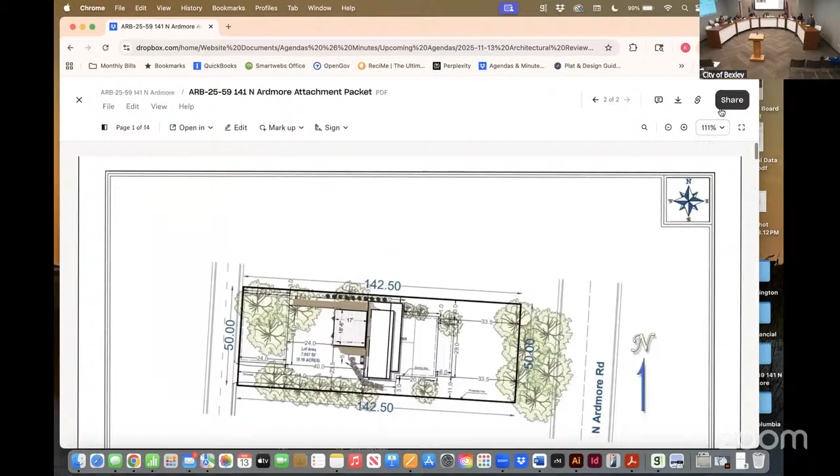Is the applicant here? Okay, seeing no one, we will hold on to that, and if they show up by the end of the meeting, we'll just add them to the end of the meeting or end of new business.

Okay, so we'll hold it to the end of the meeting and see if they show up by then. Okay, the next application is ARB 25-60. The address is 164 South Stanwood. The applicant is Amy Lauerhass and the owner is Catherine Todd. The applicant is seeking architectural review and approval of a certificate of appropriateness for a second floor addition over an existing 1-story of the house, back porch and deck addition.

And I see Amy is at the podium. Can you be sworn in, please? You state your name and address, please. Amy Lauerhass, 753 Francis Avenue. You swear or affirm the testimony you give this evening will be the truth? Yes.

Okay, do you want to give us a little bit of background on this project?

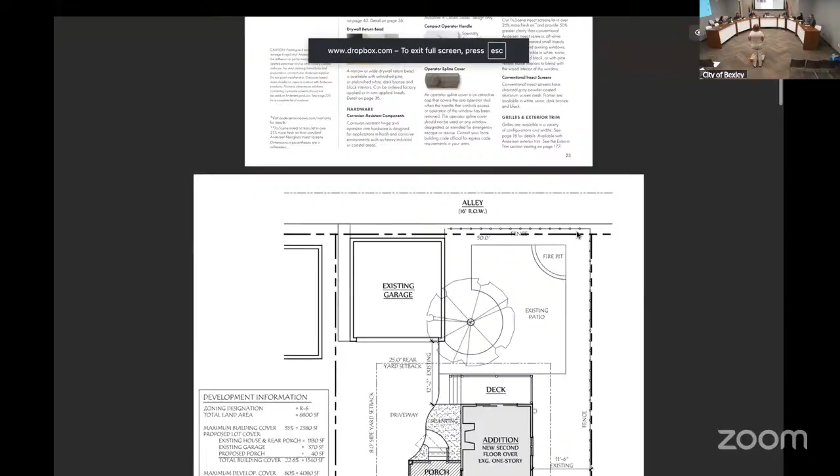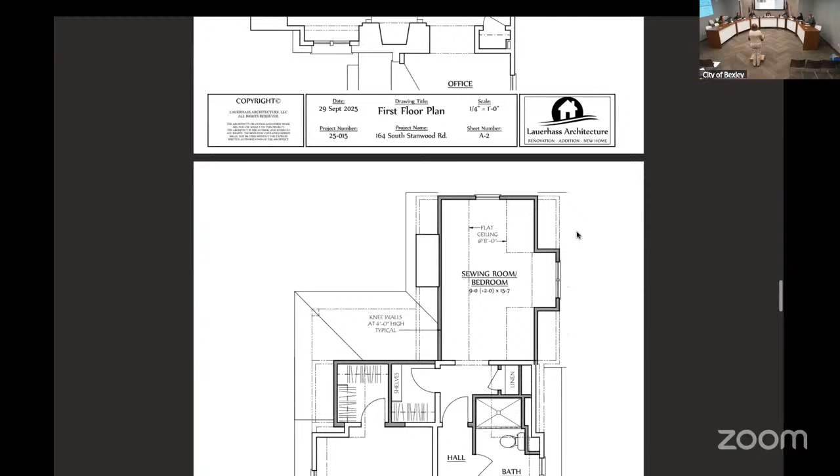Sure. So basically we're doing two things. There's a one-story addition on the back of the house that we're adding a second story over, and then we're adding a small addition on the northeast side of the house to include a mudroom and a covered porch.

Okay, I guess we'll go right to... oh Karen, do you want to give any input? I really don't, I mean I usually do, but you don't have anything else to add? It was proposed as a consent item, but I think a couple board members had a few questions. I don't have to add anything first.

Okay, we will go straight to board members then. Is there a board member who would like to go first with their questions for Amy? Well, I might as well let the rabbit out.

So my question on this has to do with the style of craftsman architecture. Your addition bumps out in plan, so the peak of your addition no longer aligns with the roof of the existing house - you can see where it's poking up there. The original design of this house, when you have an extension, it always happens to be in line, but it never creates this funky peak area.

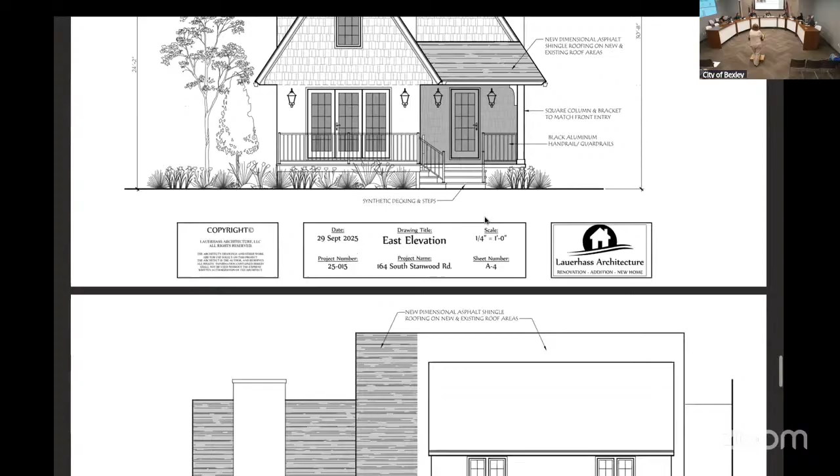That's just an addition, a second floor over an existing addition that's already there. Right, but the way you've designed the roof of the second floor doesn't allow it to be seamless with the roof behind it, like the rest of the roofs on this house - or not all the roofs, but there's that alignment. It feels weird that it's pushed off and doesn't fit the character of the house to me.

Well, if you can scroll back to the south elevation, the part of the addition - you can see there we are extending part of the main box of the house, but then the second floor addition is over that existing one story, which is already bumped out. I basically kept all the existing soffit depths and roof slopes so I could get the maximum amount of usable space upstairs. The roof is so steep that there's not a ton of space up there. I felt like that was a little bit better detail than having a totally different roof slope or not having the same soffit detail as the rest of the house.

Yeah, it's tough, isn't it? And it sits so far back that I don't think on this side you'd really perceive that, just because it's so close to the lot line. Yeah, the elevation certainly exacerbates that - you can see how they're off. Maybe it's just because the line work is so strikingly different from the way the existing roofs meet, having that little bump. So my question to you is: is there any other option for that roof line to tie in more gently where they come together?

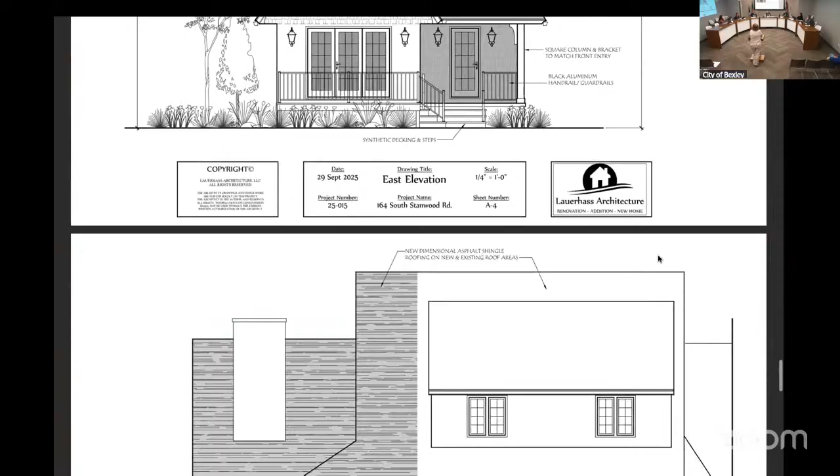I mean, that was my only reaction - it just doesn't look right. I think there is a valley, if you look at this. Oh, there is a little bit of a valley, yeah. So you'd have to have some kind of cricket inside where the two roofs overlap - there's a little valley there.

Yeah, I think you would see that walking by as you look back - you would see this for about one foot. I guess from this angle you don't see that the dormer is projected out quite a bit beyond the main house dormer.

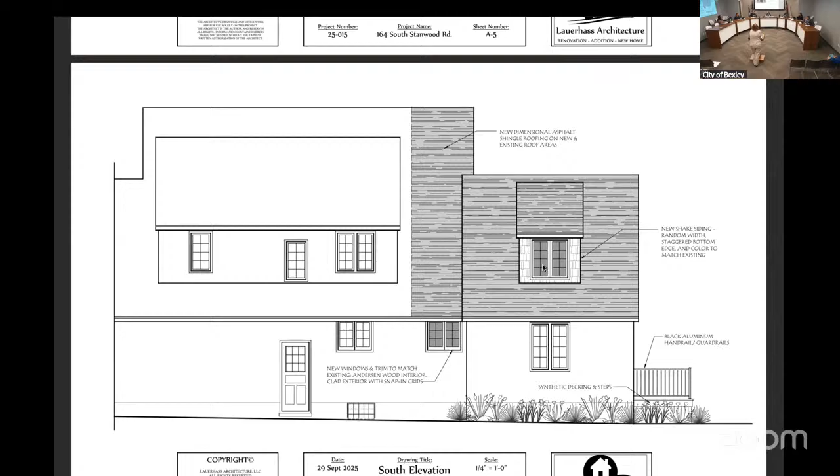The only way I could see to potentially try to align those is to just make the soffits different. But if you go to the elevations, this lower right elevation, you can see how the roof eaves and the sweeping of an eave can actually add to the character of the house. And I didn't know if there was a way, because that's...

Asymmetrical, even though you come to a peak, but that peak does align with the window - the dormer or the gable window above does align with the windows on the first floor.

But in your addition, what do you have back there? You have the triple doors. I'm just wondering if there's a way to keep that localized symmetry of the upstairs window in your elevation and the three doors on the bottom, but pull that roof line and then maybe do an asymmetrical sweep.

Maybe there's brackets on the south - that would allow that roof to go back in plane with, I don't know. That was my only comment. I mean, it's a beautiful design. I just wanted to have the conversation to see if there's a way to make it work.

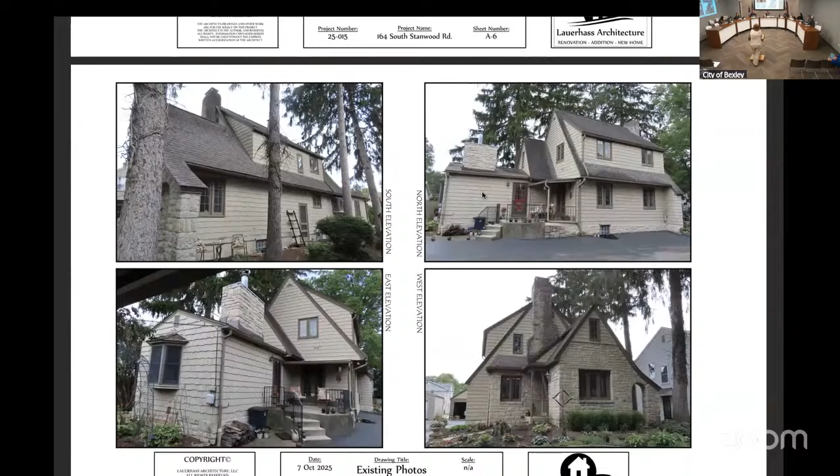I'm just worried how much actual real estate I'd have upstairs in that bedroom. Well, can you go to the elevation? I'd have to probably expand that dormer.

Well, I guess I'm just saying that like right here, go to here - and then the dormer slope reduces a little bit, but you don't lose any room. This is all happening above your ceiling. Oh, I see what you're saying.

So this would come down to the center, and then you do a gambrel there, and then this dormer would then be at somewhat lower slope. But at least you would tie the ridge of this into that intersection with this, where it comes down and it slopes and intersects right at the center line here. I think the quirkiness of that gambrel in that location would be fairly hidden, but it at least would tie things together.

And that would be a lot less hidden than what I've shown. But that would change the pitch of the roof, right? Yeah, roofs won't have the same pitch.

To me, a gambrel is this - the roof will have the same pitch until you get to here, and then it slopes in at a different slope. So it'd be a gambrel, but it's a very small gambrel. There's enough quirks on this house that I think you could get away with that as an addition, that it would read as part of the natural character of the house.

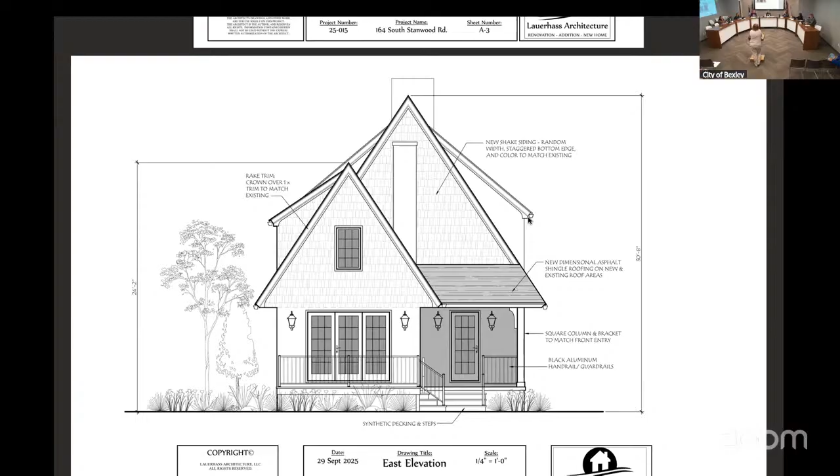Go back to the side elevation. In the side elevation, Amy, it looks like the other one, like about a foot, keep going. Oh, you were right, Dylan. There's the... yeah, it's basically the wall thickness and then the rake trim. That's all that's there.

You're not actually, I mean, there's the wall overlap. There's not really any wall overlap. But the trim work is to both sides. So basically with snow and everything, that would all have to be metal. You wouldn't be able to take the shingle into that valley. It would have to be brought up on the rake and on the roof.

Anyway, I just think there's an opportunity to clean it up. I'm certainly happy to look at that and work with Karen. So not a condition, but rather a suggestion to explore. Yeah, I think so. This is a detail we've done before, and she always comes up with an option.

Is there any other board member that would like to talk about this application?

Okay, so are you good then? You'll work with Karen and just come to the best result, yes? Okay. Is there anybody else in the audience that wants to speak about this application? Okay, seeing no one, so we are basically approving it.

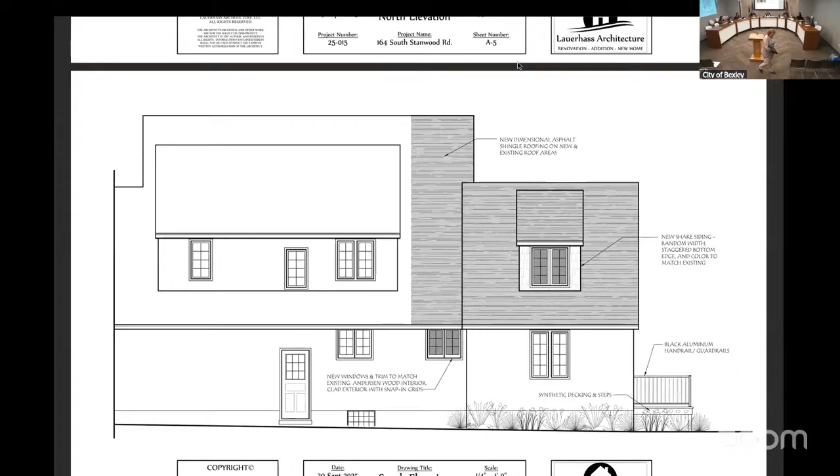The next application is ARB 25-61. The address is 217 North Cassingham. The applicant is Sean McAllister. The owner is Jim Wingard and Janice Mannheim. The applicant is seeking architectural review and approval of a certificate of appropriateness to replace the front porch.

Sean McAllister, 130 North Maple Street, Marysville, Ohio. Do you swear or affirm the testimony you give this evening will be the truth? I do. Thank you. Will you give us a little background on your project?

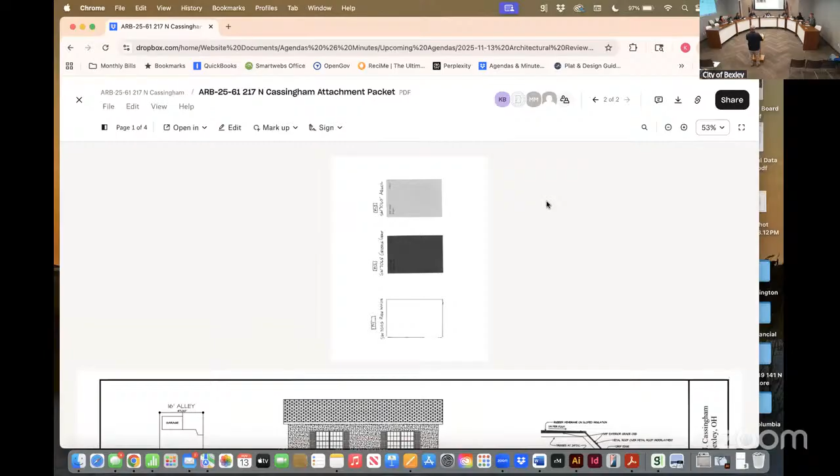Yeah, my client wants to do a new porch, and also paint the front, remove the upper shutters, put trim on there, and replace the shutters on the downstairs, lower level. That's pretty much it.

Okay, is there a board member that would like to go first with this application? You want me to do public first? Is there anyone else in the public that would like to speak about this application? Okay. Is there a board member that would like to go first?

I'll go, Ms. Panofska. I'm curious about some of the design decisions for the styles. That's what the owner wanted. So, yeah, that's the best way I can answer, in terms of the roof material and the changes of the metal, including the style of the column and everything.

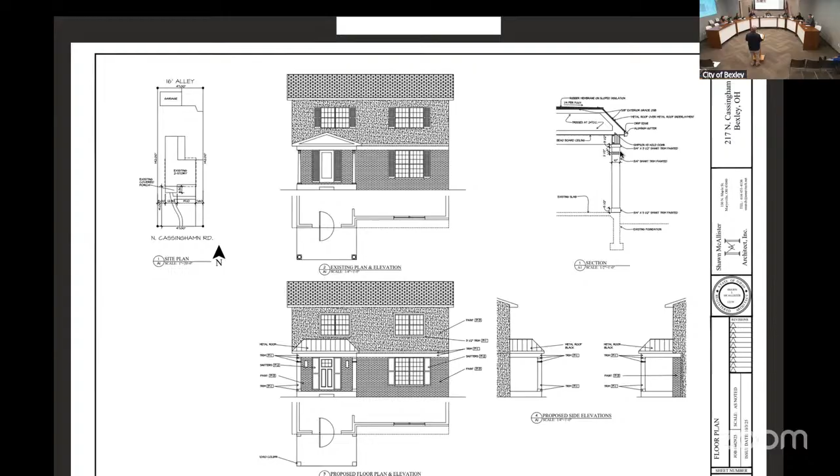Okay, I'm more curious about the decision. Yeah, you basically would have a piece of trim. There is a section in there, if you look on section 3A1.

Yeah, I don't know if I understand the inclination for it. Just stylistically, for me, it just doesn't do it.

Is there anything else, Ms. Mattson? No, not at the moment. Is there a board member that would like to go next? I have a question first, Mr. Scott. What was discussed up to this meeting with staff?

So I wrote my staff report. In my staff report, I pointed out that I don't really understand the massing of the... well, first, let's just go back and say I hope all of you drove by this house, because with the risk of insulting the owner, which I certainly don't want to do, there's not a lot significant about this house. So I'm not particularly tied to the gable, as opposed to a different kind of portico, but I don't understand the choice of the shape of the roof.

It seems to me like even if you wanted to go with a metal, then maybe just a simple shed. Yeah, that's what I would suggest. Better massing, because this is, especially if you take those shutters off of the second floor, that is gonna kind of be tiny compared to the amount of exposed facade, in my opinion.

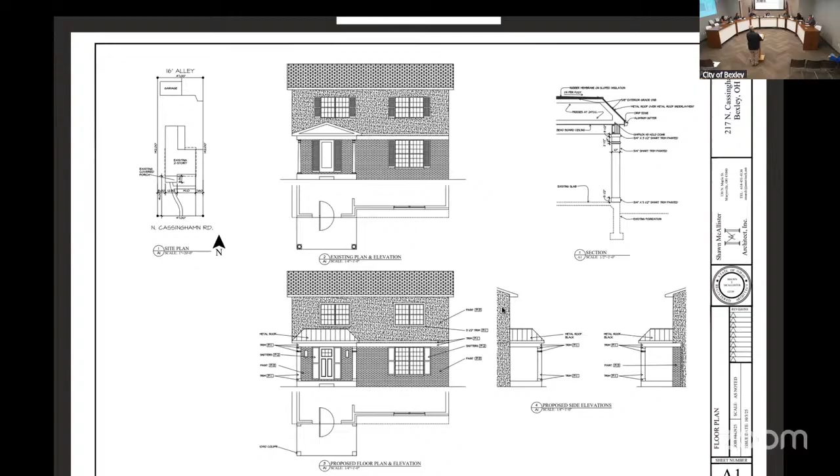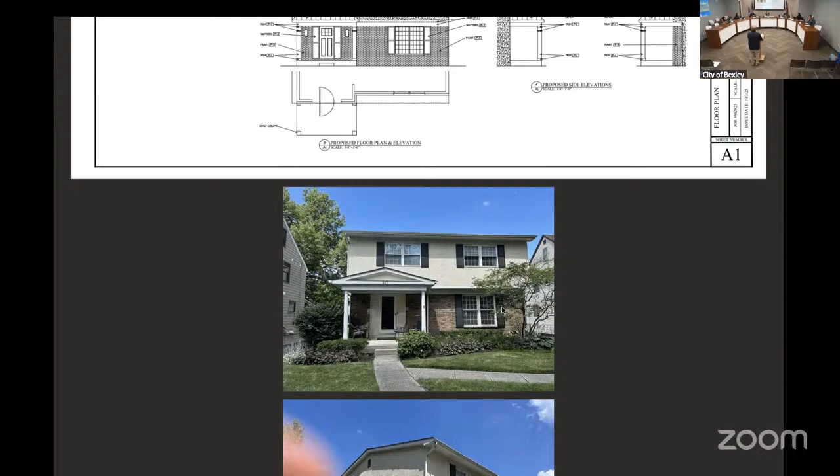I know there's existing shutters. I was looking at this photograph of the front facade, and for the life of me I thought there was a big piece of glass over it, because it looked like a reflection, but it's white paint. Are you planning on painting the brick white? No, it's going to be painted - it just looks painted in the photograph. Okay, so you're painting the brick.

It looks like a light gray. And the shutters, are they being replaced right now? Yeah, they're being replaced. So you're doing more of a paneled shutter, left and right of the door. Yeah, and those are the darker color, the shutters.

And then is the door going to be the same color as the shutter? It's a good question, I'll have to find out. I don't think they have to be. I think the shutters - I'm assuming there might have been side lights at some point, because the brick stops and the shutters are recessed in the facade. So I'm guessing at some point this door might have had side lights that got covered up.

Maybe not, but there are times where there's detail and ornamentation, so I'd think about moving away from the terminology of shutters, but maybe just frame trim work around that door, not making them look like shutters - and I hope it's not a product you're buying to put in there. I'd look at left and right of that door having a little more trim detail, panel-based, and keeping the detail simple but making the door integrate into that overall opening where the brick is stopping.

And I think that's the last of my comments. Ms. Jones?

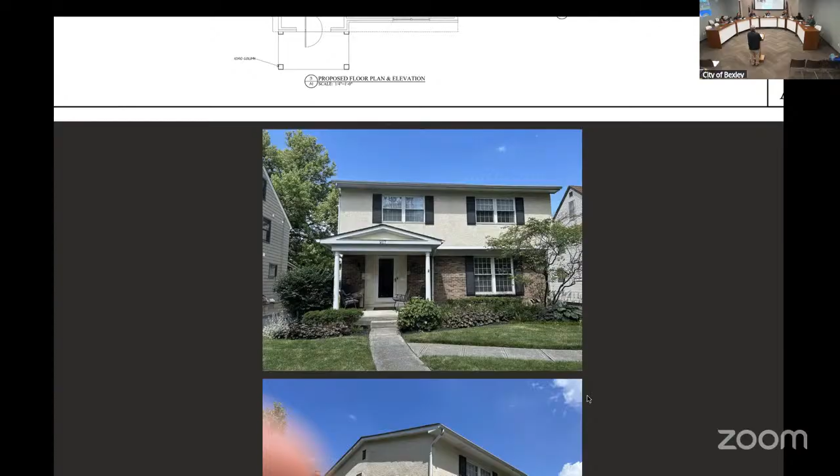A lot of my comments also had to do with the scale of the proposed columns, and whatever shape the roof of the portico might take. I do think when this is done it's going to be a really nice addition to a house that could use a little refresh, so I think we're all supportive of the cosmetic edits you guys are proposing. I think the paint colors you've picked are appropriate. Sometimes painting brick gives us a little heartburn, but looking at the brick here, I think it would be a fine thing to paint. So that's the extent of my comments.

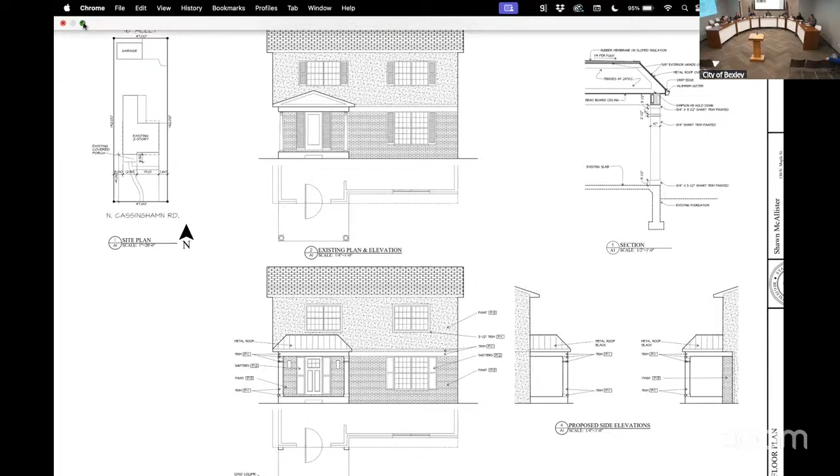The next one is application BZAP 25-45. The address is 2680 East Main Street. The applicant is K4 Architecture LLC, Sandy Tenhenfeld. The owner is First Financial Bank and Jeff Hartley. The applicant is seeking a recommendation to the Board of Zoning and Planning for a certificate of appropriateness for an exterior renovation of the existing banking center.

Is the applicant present? Please come forward and be sworn in. Rick Posey, principal with K4 Architecture in Cincinnati, 555 Gest Street, G-E-S-T. You swear affirm the testimony you give this evening will be the truth? Yes. Thank you.

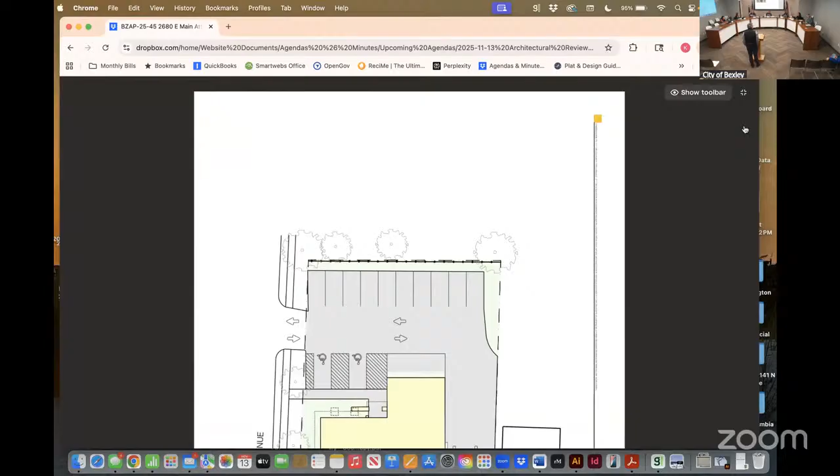Okay, can you just give us a brief synopsis of your design? Yeah, first of all, I apologize that I am not Sandy Tenenfeld, who's been speaking with you.

I just wanted to say Sandy is not here. Her son is in a band competition in Indianapolis, so she couldn't make it back. Not to expect her. Okay. And I let her know that I usually give a staff report to begin anyway, so that I could fill in the board, if that's okay with you. Oh, absolutely. I've been working with Sandy, who is part of your firm.

And the idea here is, well, there's a lot of ideas here. There's an addition to the back of the building that is proposed. This building currently, and I'm also going to let Matt chime in for anything that is actually zoning, but it overlaps in design a little bit here. So if I don't cover something, he'll fill that in. But this building currently really uses the back entrance and not the front for banking. So what the client wants to do is close up the front door, which is kind of antithetical to what our principles of Main Street design have been.

Having said that, I think we need to look at this project as if the Board of Zoning and Planning allowed them to actually remove the front door, is there still a front presence? That's how I'd like to encourage you to look at it. And that's how I talked to Sandy about it, that the column remain and the bump out still look as though it, envision it if somebody else occupies this building, could it easily be brought back to a front entrance

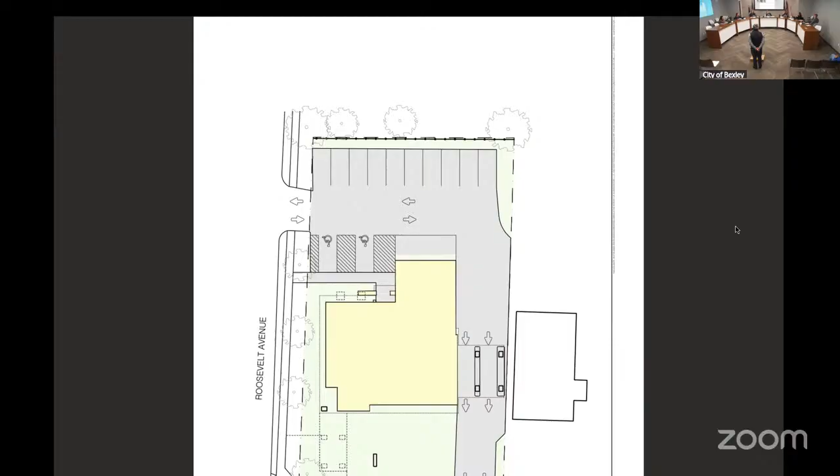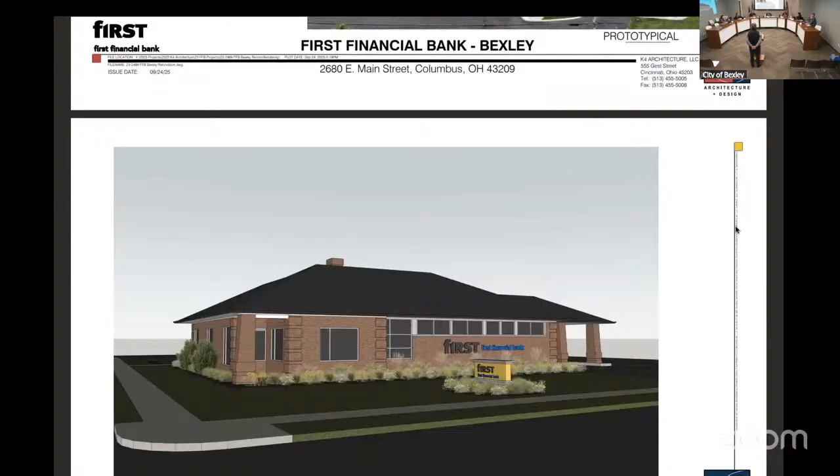This is going for variance. It's going to zoning for approval, a removal of the front door. No, it doesn't need a variance. Maybe a slight variance from the mixed-use commercial design guidelines, which say shall have a front door entrance. However, the way our Main Street design standards set up, the process is that BZAP is the approver ultimately, right? And then the applicant can come to you when it's requested by BZAP, but BZAP is supposed to look at everything. When it's more architecturally forward or visually things are changing, to be customer oriented, we like to just send them to you.

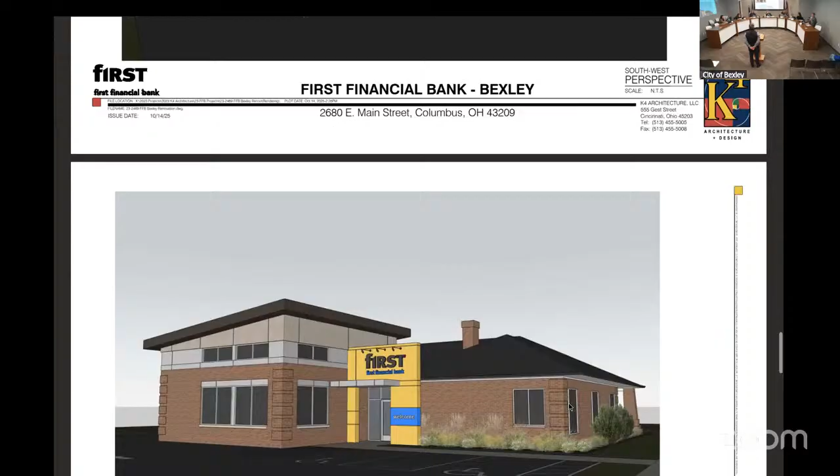Otherwise they would wait to go to BZAP on December 4th, then come to you, then back to BZAP. I figured BZAP's going to ask what our architecture review board says, so we had them come to you first. They will also go to the Tree and Public Garden Commission, since part of those columns and pavers juts out near a planting easement and ties into the landscape in the right of way, so that commission will see this too. They're looking for a recommendation from our board, that's how it's set up in the code. So, a recommendation from you all to BZAP, and back to the tree board.

I don't know if it's just for rendering purposes, but are they proposing removal of a tree in front? I don't think so, I haven't been told - might just be the rendering. I believe that's a planting easement on their property, but those are city trees along there, sycamores I think, which I believe we've since trimmed up. Let me know if we haven't. They're not trimmed up yet. Okay, I'll ask our forestry department to look at that again.

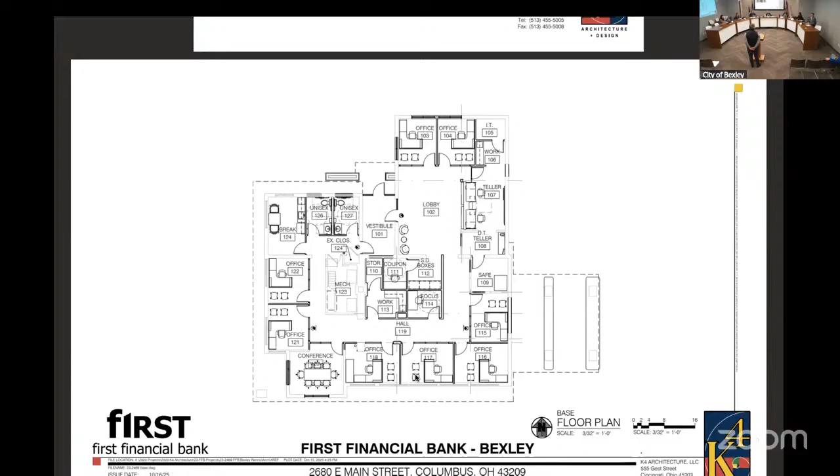Mr. Klingler, can we have clarification - is this application BZAP 25-45 or 64? On my agenda it says 45, and on my screen it says 64. Maybe it was a typo. Mine says 45. The folder says 64, but all the files inside say 45. This should be 45, I think we made a typo, just wanted to be clear. I apologize, I'll change that right now.

Okay, is there anyone else in the audience that wants to speak about this application?

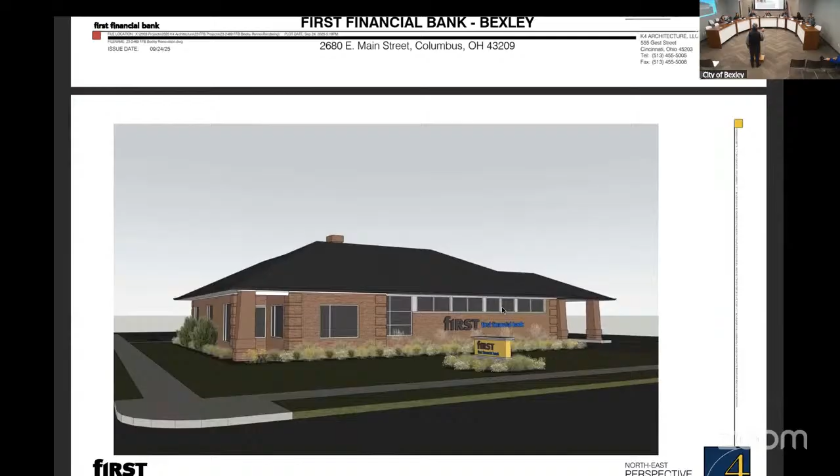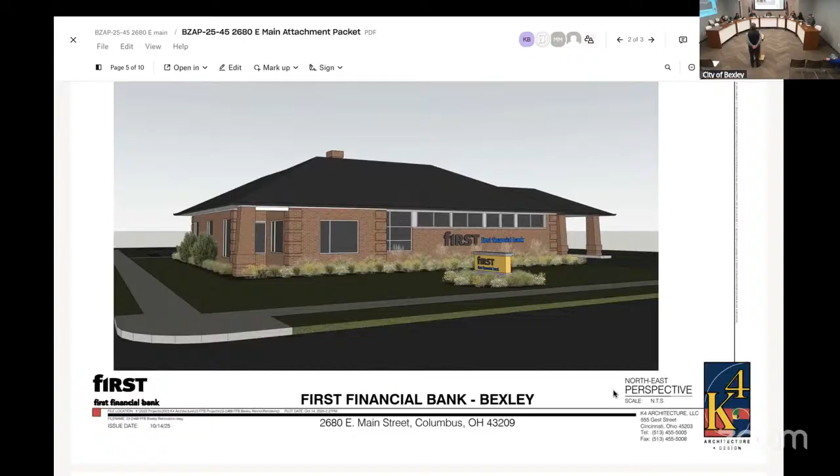If I could just add a couple background things to what Karen talked about - so why are we here, why is the bank wanting to do anything? They've been in Bexley for about 10 or 11 years, but it was only in 2022 that they actually became the building and property owner; before that they were a tenant and the former landlord held title to the building. Now that they own the asset, they're growing and they like Bexley, so there are improvements to the interior programming and functionality to get a few more offices and workstations and improve the workflow. Also, I'm an architect and a dues-paying member of CNU, and the beauty of communities like Bexley is we don't make them like this anymore - they're walkable, street facing. So losing a front door is a big deal.

But especially for the bank, there are always security issues since the parking is in the rear. Customers using the front door, especially commercial customers coming to make a deposit, might be carrying cash, and they're walking from the parking lot since there really isn't street parking. So in reworking the interior and addressing the security concern, the choice was made to improve what is functionally the main entrance, which faces the parking lot, and eliminate the front door. Although we're putting a window where the front door is, we're maintaining the little covered portico and one of the columns, so that in the future, if it's ever sold, it could easily be restored to a front door.

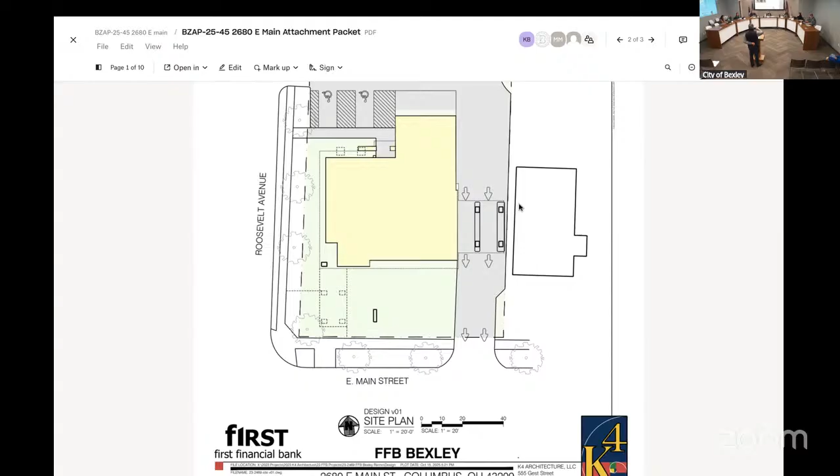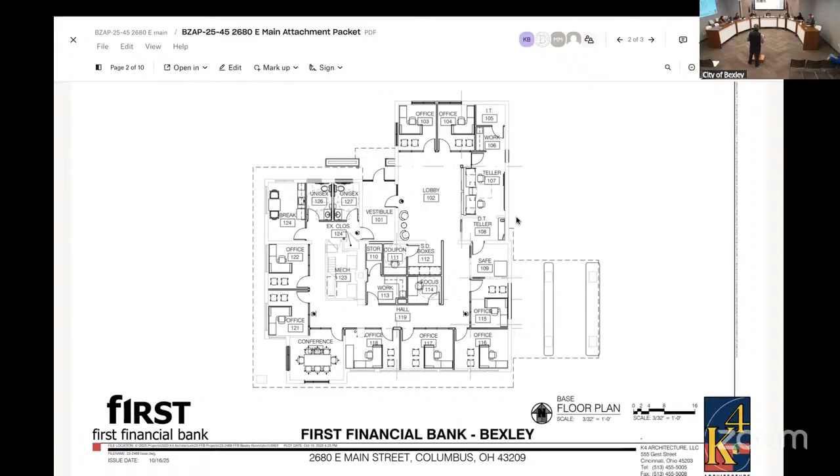So in an effort to daylight that, raise the ceiling height and begin to incorporate brand standards of the bank, at least when you walk through the door, the elements, the experience is fairly consistent, whether it's a new branch or an existing building.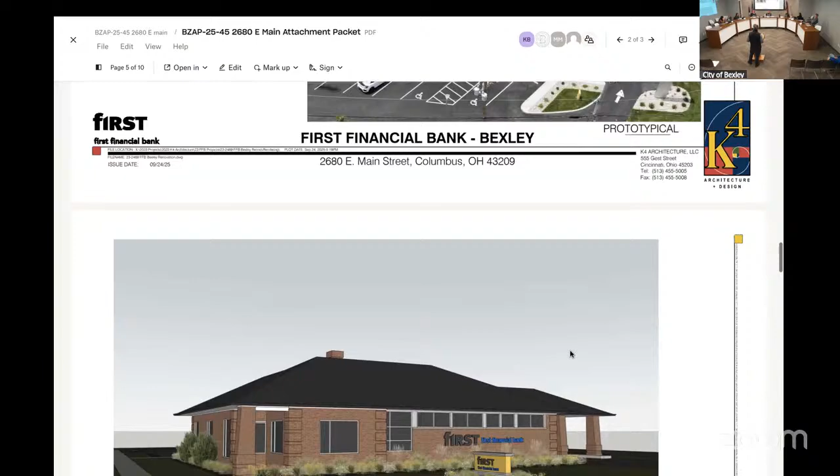You'll see here, when they build brand new branches, a very contemporary look - we'll get into talking about the yellow metal, an especially formulated color for them. But you'll see there's a raised clerestory that allows light into the lobby, and it's that element that you're seeing repeated, at least in our proposal, over that existing flat roof section.

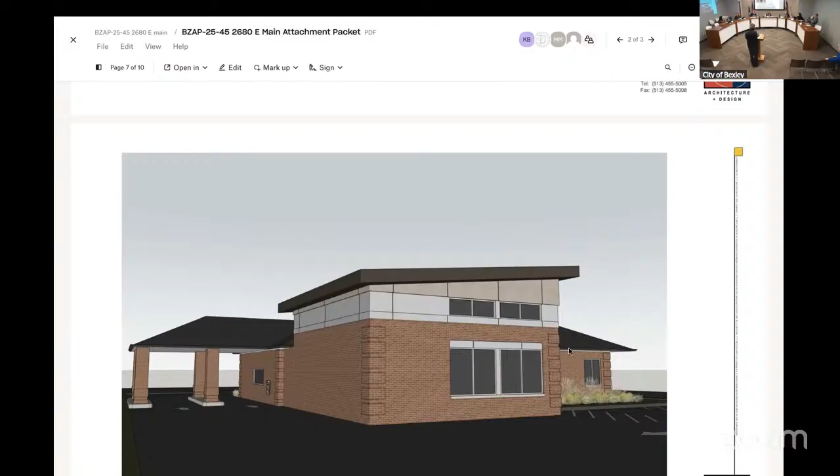And I would point out, we're raising - so the brick wall height's what exists, and we're raising that. We're separating this element with a section of flat roof that will transition between this section and the hip roof of the original building. And that continues around - go to the next - it continues behind the sign panel. So that section of flat roof resolves the extended height we're adding here.

We're also removing their existing condensing units right here. We're lifting those up onto that flat roof, so they'll be hidden. Secondly, behind the blue panel on the entry sign, we're hiding the gas meter and the gas service with that entry piece.

I think I'll stop there and take questions, concerns. Is there anyone else from your group that wanted to speak? Anyone want to speak now or wait? Okay, I would say that Jeff is the owner's representative. He is here, so, okay.

Let's go to the board then. Is there a board member that would like to go first? Mr. Scott?

Back in the 2000s, this building sat and had very little street presence, and our firm was hired to engage the street - we added a long covered walkway up to the sidewalk. I see that, full disclosure, I didn't work on it, but I am familiar with the project. First Bexley Bank, I believe it was.

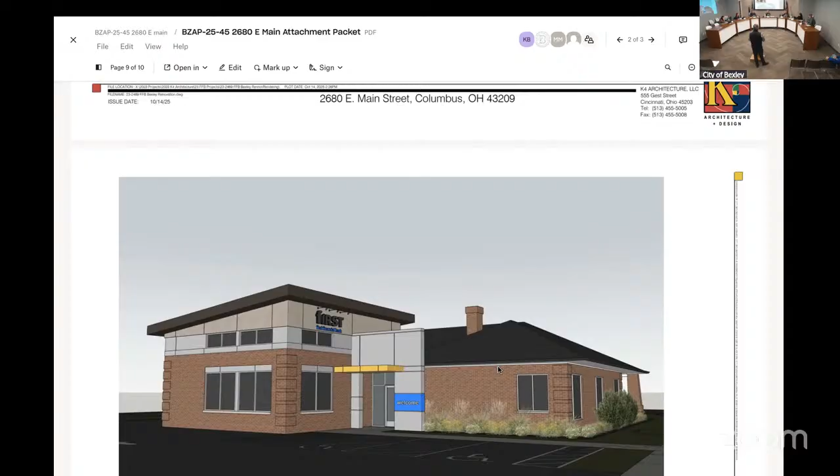So it looks like that now is being torn down, and one column is remaining, which I think is part of the original. I think that's where the design stemmed from - we've repeated that out. So you're going back to more of the original design of that building.

But it does cut off all pedestrian aspect, or connection to the street. And if I did want to walk here, I'm going to have to walk back and out and around to the back of the building.

A lot of the banks that we see that are set back like this, even the Huntington building that's there, does have main street access, pedestrian access. But I believe the Fifth Third is set back like this, and the main entry is in the back because that's where people are parking - you're also contending with the drive-through. The drive-through is going to be active, correct? Yeah. So, you know, I get it, and I understand the reasoning.

I'm disappointed that the pedestrian access is being lost. Though we're not talking about a lot of distance. A lot of the things we've been working on in the city on the commercial design guidelines currently underway, even the land use strategies, it's really trying to activate our main street. And this feels like a step backwards.

I would agree with any argument that said the existing portico that's bringing pedestrians is heavy, it's dark, it's not very inviting. And I get that it doesn't work with your internal programming and your layout of the bank. But I think it's a loss to what we're trying to build as a community, in the fabric of Main Street.

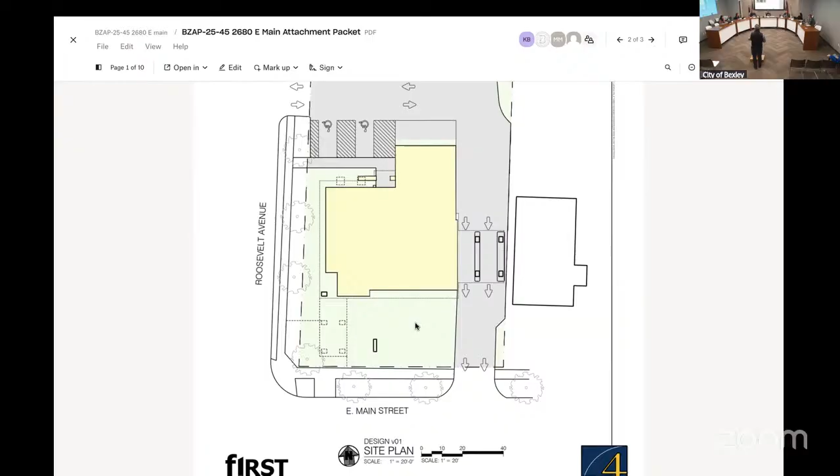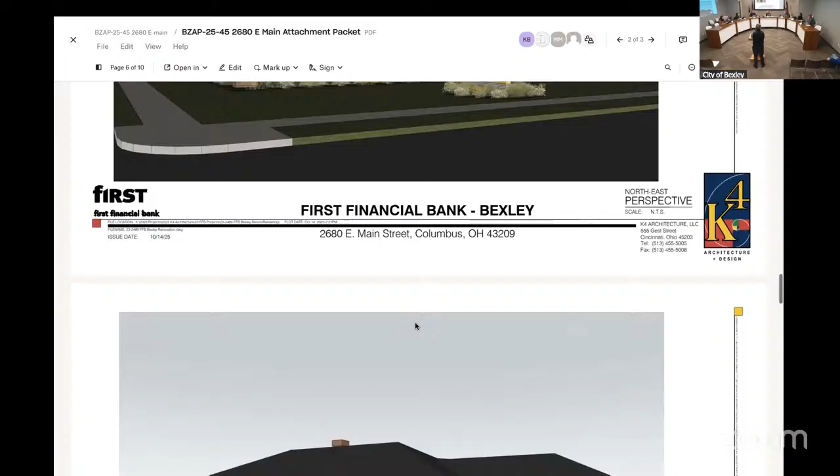Moving on, looking at the design of the massing, can you go to the rear? I understand there's a brand color. It's pretty bright. It looks like it's going to be located mostly in the back, except for the little sign in front.

So I'm not a huge fan of it, but I get it. We do projects all the time that have brand colors we have to work into it. I don't mind the addition to the massing in the back. The shape of that, I think, is fine. I question, and need a little explanation of what's going on with the materiality, why the material's changed as you've raised this up.

I know there's a clerestory of windows, I think I'm fine with that. I'm just curious why the color's changing and what the materials are doing. So the wedge shaped piece on the north is proposed to be EIFS. And then the panels where the windows are, that's metal, an Alucobond. Those are elements off of that prototypical building.

The materials, masonry, different colors, obviously a flat roof building with a clerestory. We're adding the windows and cutting those openings into the existing brick. Then as you go up, that clerestory band is a band of metal panels, and then EIFS above that.

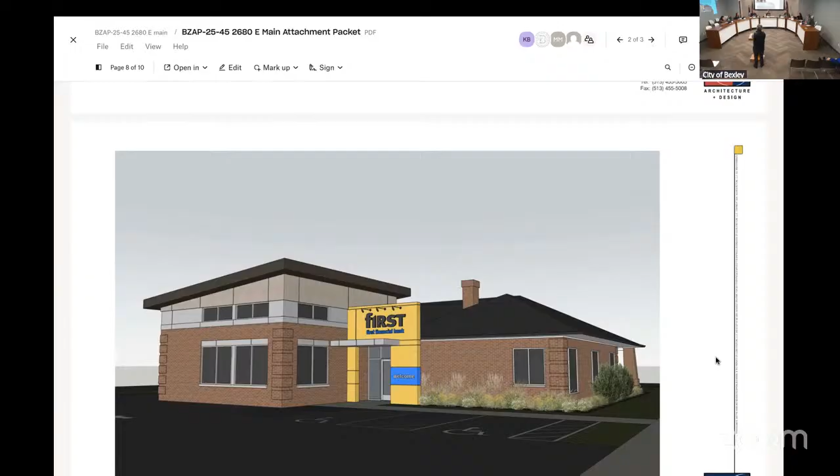So in one sense, I see a lot of opportunity for the front of this building, which the way you've rendered it in this northwest perspective is a suburban ranch bank building. That's what it looks like, with all the plantings in front and the roads and the fact that it's set back. So the attempt at bringing it out to the street was one solution, but we're not seeing a solution here to help make it feel like it's part of a pedestrian zone.

Even if people aren't walking into the bank, it's still part of the public streetscape. So one thing I was thinking is, why not make that conference room more prominent?

Why not actually create a glass enclosure that comes out towards the street so people can see activity in the bank, just like we have down here with the Ohio State Bank.

There's all kinds of activity happening in that building, even though there's no entrance right on Main Street. You have to go around the corner. Here you have to go all the way to the back.

But the point is that this idea of there being pedestrian presence and activity on Main Street — you could compensate for the loss of the door or entryway by having the conference room more visible.

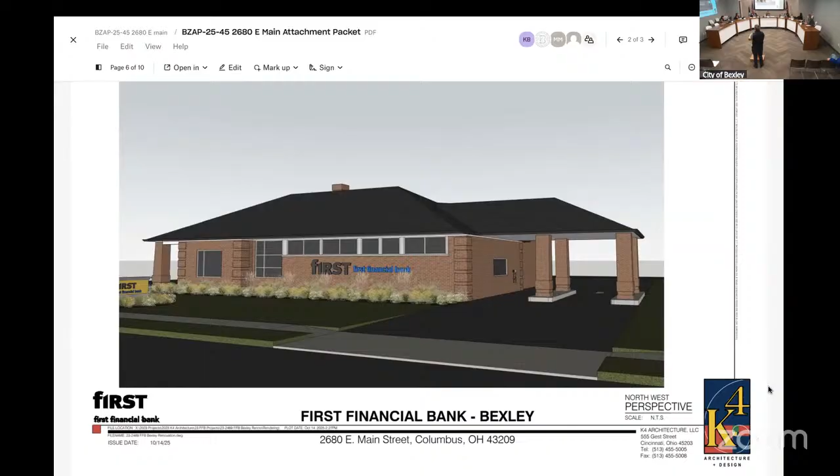I know there's probably privacy issues and all that — probably everybody wants to pull their shades for really private meetings — but I like the idea of there being this visual that there is business activity happening on Main Street that people can see, even if they can't go in right there.

So I think you have an opportunity here — you say you're adding this window, but I say blow this all out and have it actually come out, try to engage the street more as a conference room, which seems kind of oxymoronic, right?

The conference room is not engaging with the street, but it is, because we're seeing the activity — we're seeing something happening in the public realm in this space.

So that's just one idea, but this to me doesn't work — it's just going back to being a suburban bank. I think you could do something here that would really activate this in terms of that human presence we're trying to reestablish on Main Street.

If you go to the back — I disagree with Mr. Scott.

I do not think that this sloped roof is part of the character of this building, and I don't think that it's part of the character of Bexley. We do have some places where we might have shed roofs here and there, but this to me doesn't fit.

I understand the screening of some of the mechanical, and I understand that you want to bring light in from above to help make this lobby feel more alive. I would suggest that you create a monitor on top of this roof.

In other words, a vertical glass extension that goes up, back from the edge of the roof, like a monitor. It's just an elongated rectangular cupola.

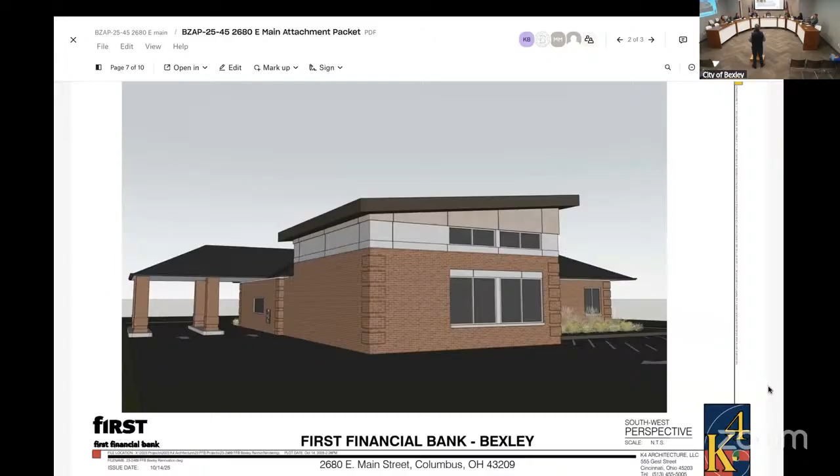I'm just trying to - it could also be a gift to the city of Bexley for taking away the door. You take that away, then you spend a little extra to say to Bexley, we understand that we've done this to your Main Street desires. So we would like to make up for that by spending a little bit extra money to make this a more pedestrian engaging type of front. I think Bexley deserves that. But as it is, with just the added window and the brick and taking away of that connection to the street, there has to be a balance back for that.

And I agree. Actually, to the earlier discussion - no offense to any previous design. I didn't design it, so I can speak - I don't disagree with any of it, but the proportion of those columns relative to the roof and the space that it encloses is oversized. Yeah, it's overwhelming.

But you know, part of it's become endearing because we've lived with this for so long, and it has a certain character to it. There's certainly buildings in Bexley that are clumsy, but because we've lived with them, they're really like our neighbor now, and we kind of lovingly accept the odd proportions here and there. You have a lot of that in Cincinnati too.

That's not the primary issue here. The issue is the Main Street access and what do you do to compensate for that, and then the character of this building, trying to build that new addition with something more commensurate with the language we have here. The yellow sign that already exists is very muted, it's very nice, so I don't see any issue with using that existing color for any of this new stuff on the back.

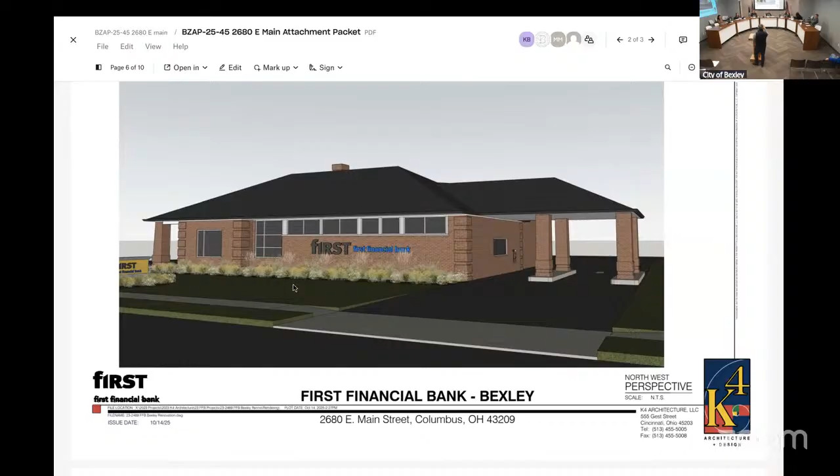Can you go - there's a slide anticipating this discussion. Next one. There, so that's an example. Believe it or not, this is the first time we've ever gotten any opposition to the yellow.

I'm joking, I'm joking, boy. I'll call you out on that.

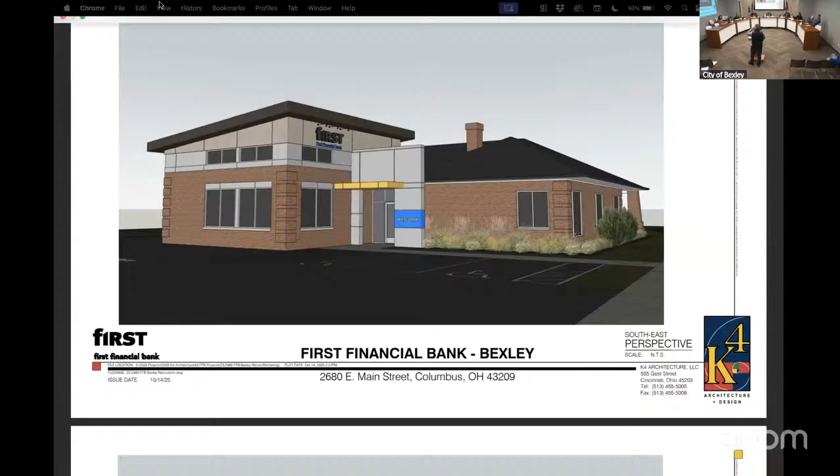So what you're seeing here is taking that clear anodized secondary color, and then we use a little bit of yellow on the little blade. This is the yellow, so it is. It's not bright in your face, but it's an actual sample of the yellow, and it's actually softer to see here than in the images. The sample's helpful.

Every one of these SketchUp renderings looks different. I'll be happy to send that.

Actually, the existing sign in the shade on Google looks even more muted than that. Yeah, it's probably faded. I think it looks great, much better than how it comes across on a screen in a rendering. But on Google Maps, it's definitely faded.

Anything else, Ms. Jones? No, that's it. Ms. Knapp? So just for clarity, because there are two things: one is settling on the use of that yellow and how much, and then obviously the BZA's concern is what we're doing to the front.

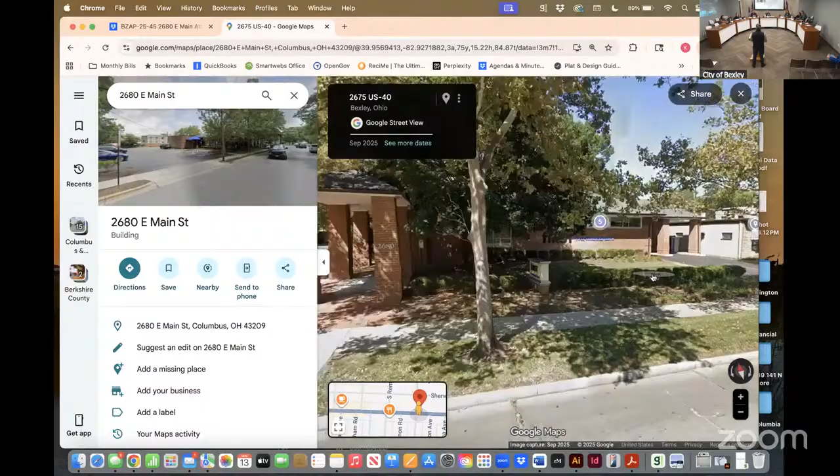There was some dialogue that Sandy had with Karen about that hardscape, even though it's private property. The public face is public. There's hardscape there now under the sort of little porte cochere. There was discussion about restoring that hardscape. I think there's a way to landscape it and still make it feel like it belongs to the bank and is not a public park.

I think about some of the stuff done on Gay Street, where those little courtyards still feel like they belong to the building. In this case, it would be a residence, but here it would belong to the bank. I think it could help regain that activation we're trying to get back along Main Street, even if it's only visually accessible to the public. It could almost be like a little mini courtyard, a visual courtyard for the conference room, even if they can't physically open a door and go out onto it.

It's part of the security thing for a bank. They like to have one door, to make it less accommodating for someone who's there to rob the bank - come in one door, out the other. Branch banks are typically small enough that the occupant load only requires one exit, so wherever they can accommodate that, that's the preference. It's always contrary to everything we're talking about here in an urban setting.

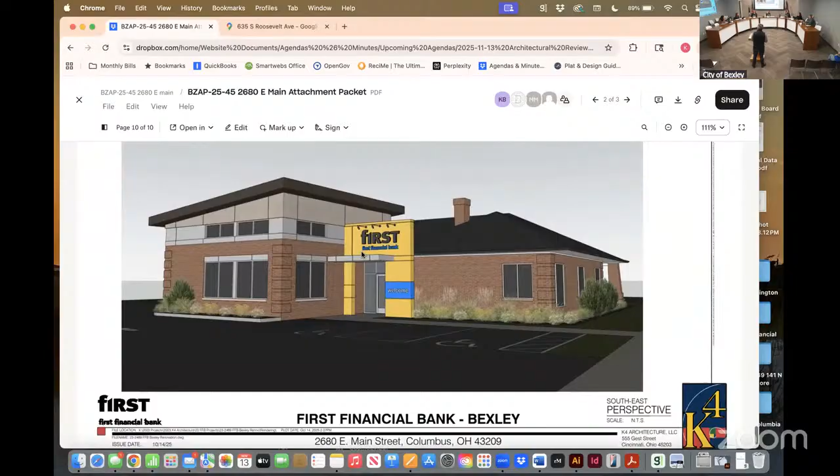But I think the front door, on the side - I'm not suggesting you won't find banks with multiple entries, I'm just saying that as a strategy. That building was built when the Main Street architectural guidelines were in place, so there would have been discussions about asking for a front door. If you go back, there's a picture in one of our slides of the building as it was originally built, and you'd be surprised what was there.

One more, I believe - keep going. It's not included, I don't see it. There is a photo that we have. There was a blank panel before. No, that's it.

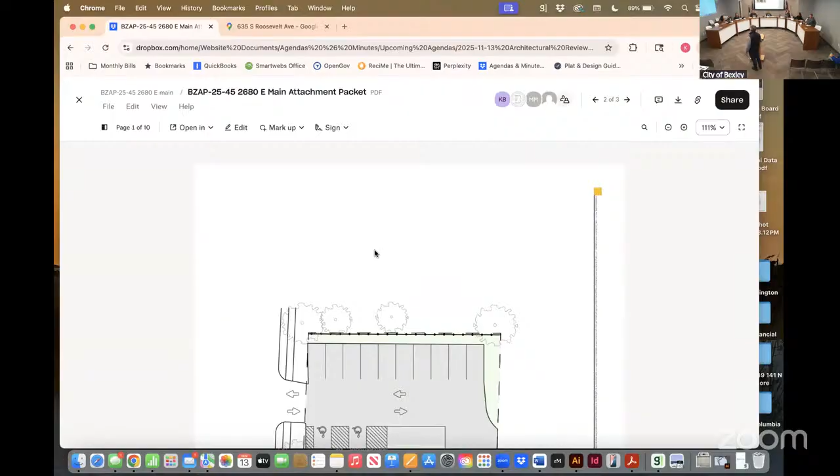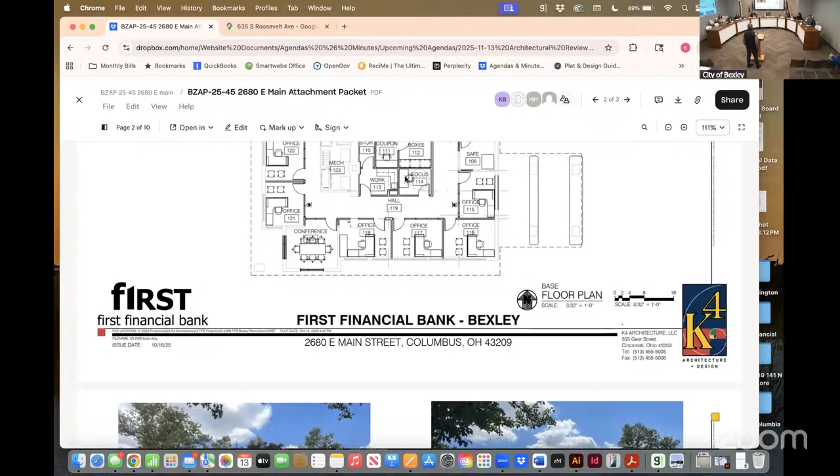Yeah, the upper right-hand corner shows where the share was at. So can we go back to the Google? So here's standing in the Roosevelt intersection, Main Street, Chase Bank. It's pedestrian entrance on the left. There's the main real entrance where most traffic is off the back north side of that bank, coming off the parking lot. Not dissimilar from what you're proposing on yours.

And then, of course, we're talking about this store, in concept, like it or not, from this previous architect that did this extension. The reason for it was to kind of activate - I mean, without that, this bank and this building with the landscaping is gone. You can't see it, it disappears. And I worry that you are demoing the first 4 columns and the roof to pull back, and I understand why.

But I think we lose something when that just becomes grass in that corner. I would be very interested - I really like the comments from Mr. Heyer. I think either all glass or a little bit of a moment in architecture in that corner and that conference room would be very helpful. I understand that you aren't going to have a front door, and that's going to in the end be a BZA issue. But activating, I think you will have more success by having a landscape plan and activating this corner a bit for the bank, for the city, and bringing this kind of civic space over and through.

There is traffic that runs down to Johnson's. There's an outside active area there. So the plan is that this is going to continue to get more and more active as more development happens. So I think starting to address that is going to help you go a long way to your arguments. But that is absolutely why this was extended out, was to get some presence, connection to the city and the intersection and the pedestrian way.

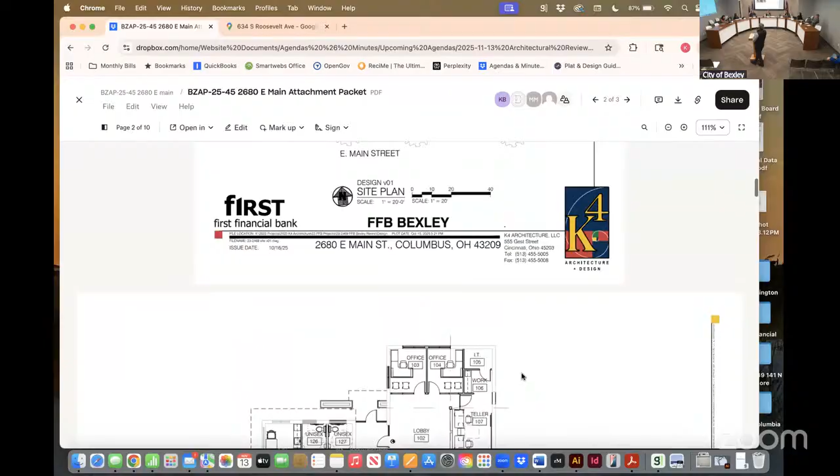And then I really don't care at all for the addition on the back and that roof. I just don't think that it meshes well with the existing building. And I think you need something that's a little bit lighter in scale. That just feels like a jack in the box to me, and it just feels really heavy. So I don't know if it's adding a lot more glass or like Mr. Heyer recommended, changing the style of the roof, but lighten it up to me because it just feels very heavy.

I'm also a little bit sad about losing the entrance off the front of the building, but I think if you do something to help guide people around so that they don't just go and stand there and can't figure out how to get in, I think it will be much more effective. So that is my two cents.

So what I'm hearing from the board is that we definitely will want to see this back, but we would like it to let them go to BZAP. Move it to, you're with that, you're good with that, right?

It would be my recommendation. This is mostly architectural. The small variance from the design standards is the front door, which, in my opinion, you all have touched on, what city staff feels like as well with activating the streetscape. We see the security consideration with having a front door right there that's never used. We understand that totally from a city staff perspective.

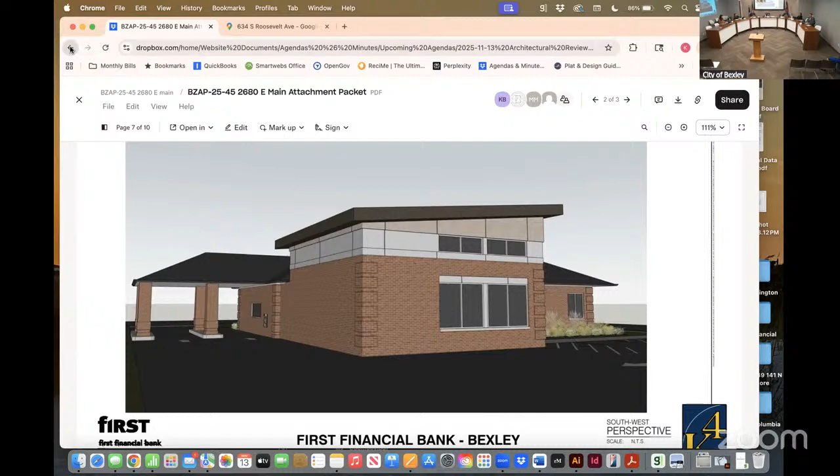For BZAP? This is you filled out a BZAP application, so it goes to both. Yeah, you're good. And I did put you on the Tree and Public Garden Commission meeting for next week, just in case. I wasn't sure if you're gonna have a landscape plan in time, but I'll update them and let them know that you're going through this process. I wasn't sure how quick all this would take place. I wanted to give you. Yeah, that's what Sandy said, that we're totally fine with that, so, okay.

Okay, our next application is number ARB 25-69. The address is 565 to 571 Sheridan, Unit 500. The applicant is Ann Taylor. The owner is LGR Investments, Larry Rubin. The applicant is seeking approval for the removal of a slate roof and replacing it with an asphalt roof.

I'm Ann Taylor. Can we swear you in, please? Ann Taylor, 86 Lambeers Drive, Granville, Ohio. Yes. Okay, and can you give us an update as to why you're asking to remove this slate roof?

Well, it is leaking right now and for the past couple years it has been repaired with blue tarps on it. And the substrate of the roof is deteriorating and it's not safe to make any more repairs, even to the slate. So we want to keep the roofers safe that's doing that.

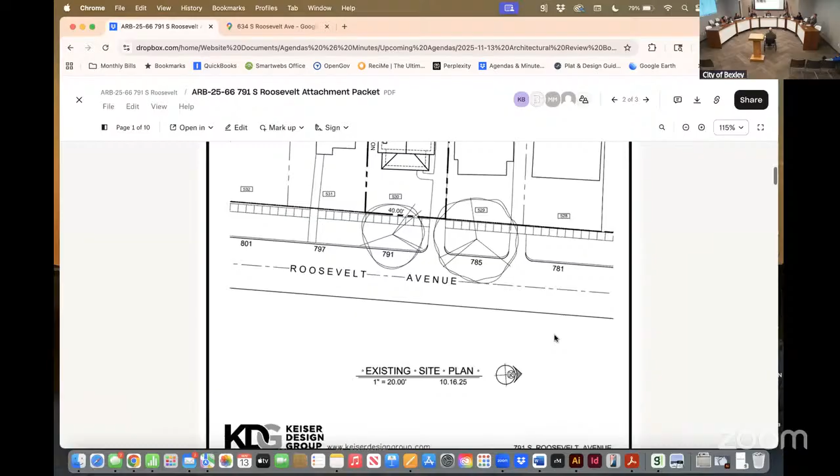I still have some pretty big concerns about this roof. There's been some work on it on the top of the roof, which I'll pull up the other drawings, but I still have concerns about how holistic the original house is and how this is broken into so many pieces, with a different kind of slope and massing, and it kind of looks like a different style.

I also have an issue with this transom window here. I think it's very foreign to the language of the house. And in fact, not all the windows are double hung, and I think there's an opportunity to use some of the existing shapes in a different way that could be more appropriate than the transom.

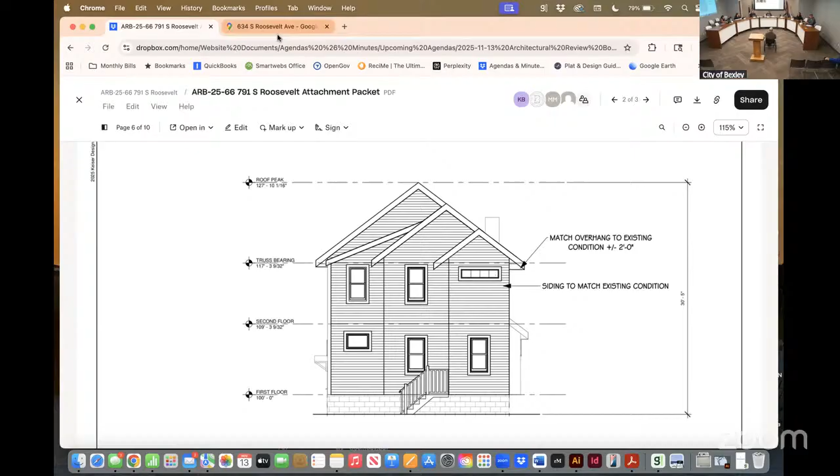But I think the massing first needs to be looked at on the rear of the home, on this addition. I'm gonna leave it at that, because I think we're gonna probably have some discussion in depth about all of this with the board, and I'll give you the opportunity as well. This must be your videos.

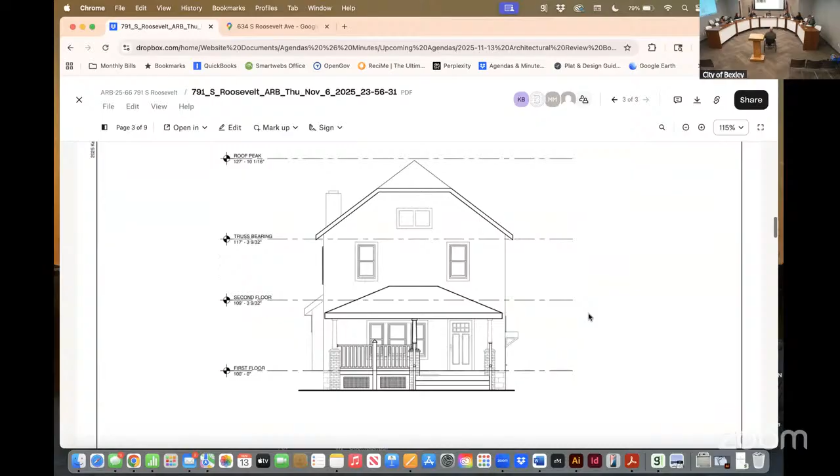Better? Yeah. Okay, this is the newer version, which has been on the website. I just clicked on the wrong thing just now, which shows the original house, which had a clipped roof, which I thought was a kind of a shame to get rid of. It's quirky and, respectfully, as you guys like to say. So that was changed on the back, but I still think I wonder why it's not all in one piece.

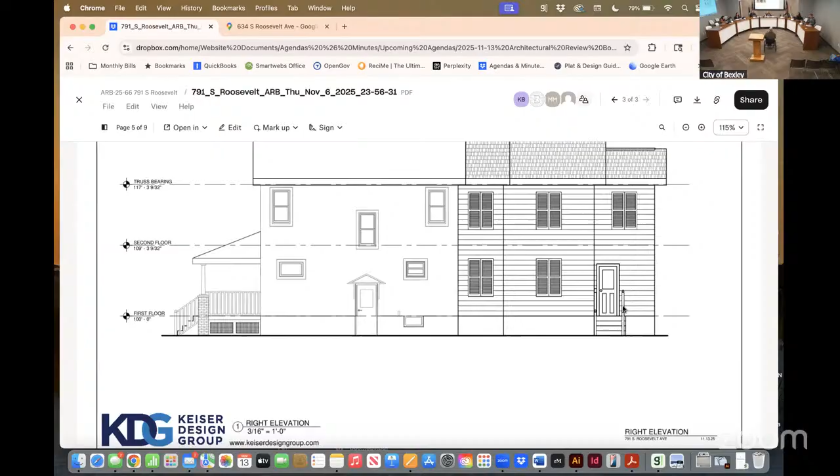There's the new elevation, yes, but they're not windows, they're shutters to mimic windows. I still think it's a mistake not to have windows on any elevation at all. So everywhere that I kind of thought there should be some windows, Mr. Miller has put in shutters that mimic the proportion and size of the windows.

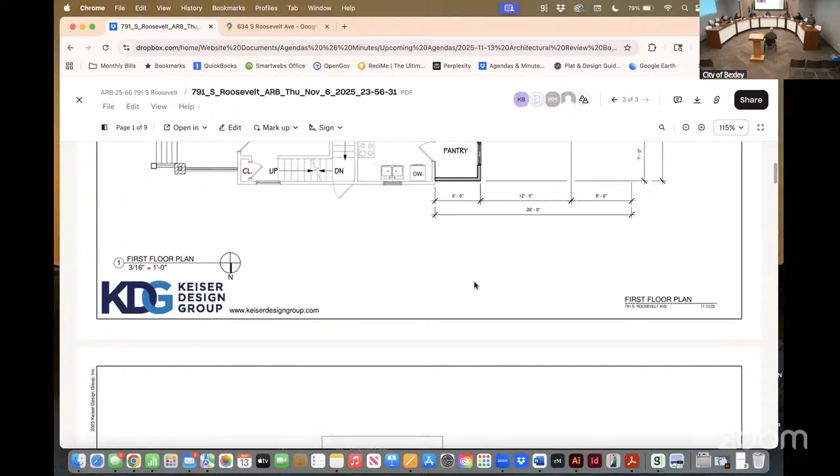I'll go ahead and let you present whatever I missed. Good. Thank you for having us. Go to the site plan, please. Is the site plan in this packet? In the new packet? The old one.

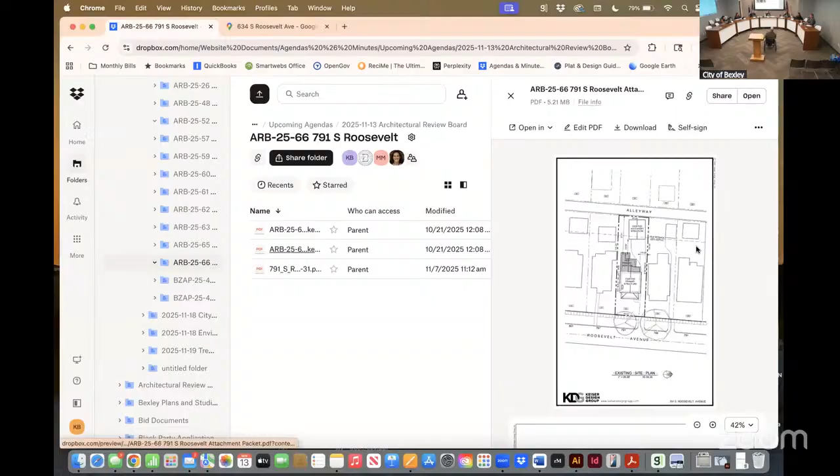I'm going to apologize in advance for this laser. I didn't realize it would shoot off like that—I tried to order one for our cats to play with, and I got this instead. Is it burning paper? Yeah, like you could Morse code the lunar astronauts with it. So I'll be careful with it.

So the original intent—the homeowners, who are here tonight, are new residents of Bexley within the year—was that they just wanted to extend along the width of the house and go straight back. That's what we started to do.

What we ran into, if you look here at the location of the garage, is that it creates this curve. So extending the addition straight back infringed on that and restricted access to the garage. One thing we looked at was flipping the garage access to come from the alleyway, but this garage takes full advantage of the 3-foot setback to the property line, and with the width of the alleyway and the elevation change, the turning radius was too restricted. So it just wasn't possible to access it from the alleyway.

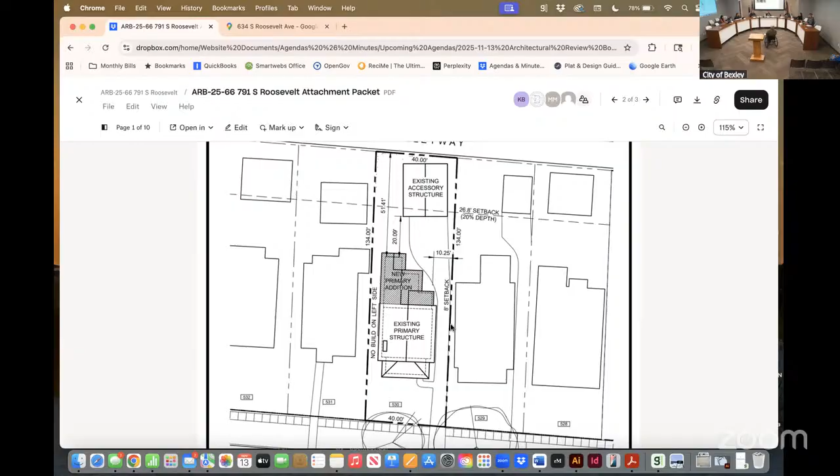So we'll go to the photos, please. As we looked at the addition on the back, we were also evaluating the whole property and found a couple of things we need to address.

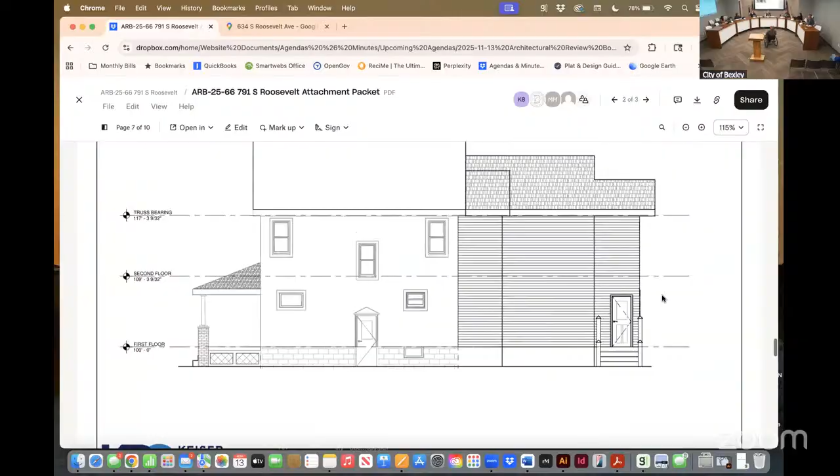So if we could go to the floor plan. He's asking you to go to the floor plan, Karen. Floor plan? Maybe the new one, sorry.

I'm gonna put you through the paces. No, just if. Yeah, all right, so

In dealing with lot restrictions, that also limited the size of what we were able to accomplish in programming. So the three exterior walls, there are three walls that were just begging for windows. It's that balance of form and function. When we put a window there, it takes up the wall that eliminates the function of the room. In the family room, that's the TV wall. And upstairs on the second floor in the bedroom, that's kind of the dresser or the bed wall.

So we really kind of struggled with that, about how to light that room and how to get the windows that it's kind of begging for. So it was that balance of good form on the exterior that turned into poor function on the inside, and trying to balance that. So we tried to come up with some level of ornamentation or some fixture there that we could put on the house that would take up the space, but not necessarily eliminate the function of the room.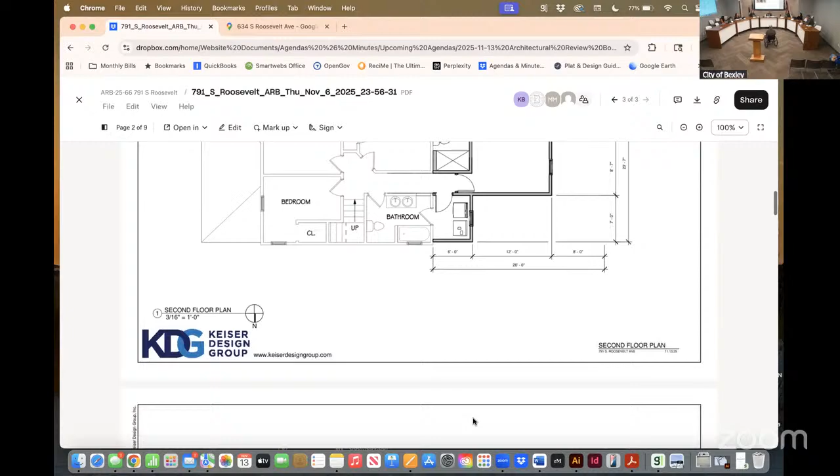I mean, Karen, could you go back to first floor if you don't mind? I think regularizing the shape of that family room could go a long way to improving just the appearance of the exterior, and might also improve the interior flow.

And I would challenge you to add back in windows, even if there's a TV wall or a bed wall. We do windows on our bed walls all the time. You can place the bed in between two windows and place nightstands in front of the window. I don't think it precludes you.

I'm sure your clients would be benefited, and you may have already shown them this, but I think it can go a long way towards telling the story, to just drop some furniture in a plan for them to help them understand context of, hey, the bed might go here and we still have plenty of room to do windows, which I think will really improve some of the problems we're seeing on the facade, as well as solving the problem of getting appropriate lighting into the space.

I mean, I think it probably has a way to go before it's in the best spot it could be. But I think those are some things to start with. And congratulations on the baby.

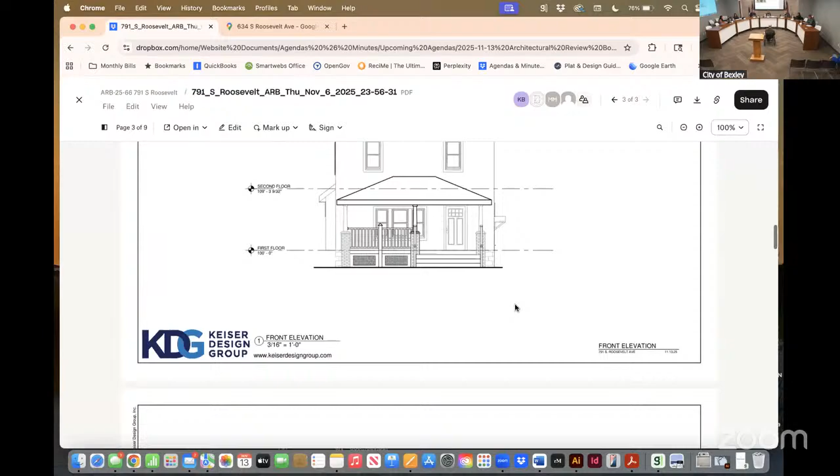I like the idea of tucking powder rooms where you can, and I do like the idea of centralizing plumbing. But if you can hide that powder room behind that back door and that little nook to the right, you've opened up everything you can do in that family room significantly.

The other comment I had was with what you've done with the front porch. Like I said, I really appreciate the detail of going back and restoring that center column and giving that life back to the porch, and centering the new stairs on the front entry. I think all those are great moves.

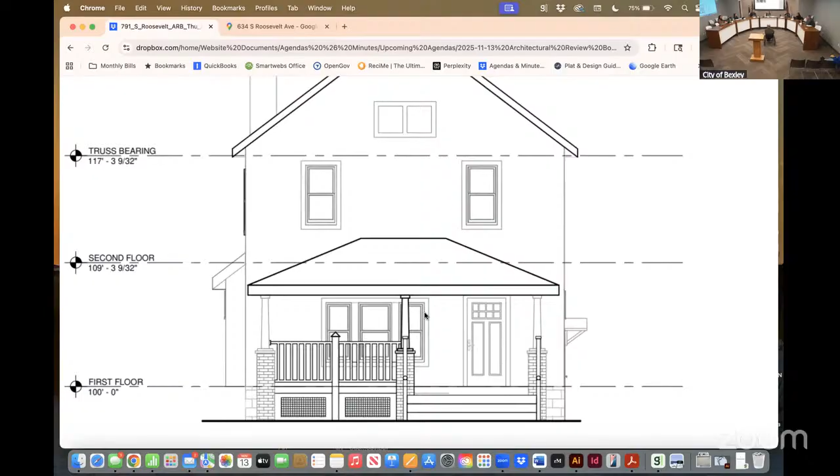Consider doing something just as nice in the back. I noticed from the last drawings to these drawings, you went from something wider as an entry deck to the back to something a lot narrower. And I'm thinking, I have kids, I've got groceries, I've got book bags after school, and a 3-foot little thing like that is going to bottleneck you. It's going to be really hard to get everyone in and out. So think about the flow of how you come and go. Those are all things I'd urge you to consider.

Mr. Scott: I couldn't agree more about that powder room. That definitely wants to live on the back. That'll give you an 18-foot by 16-foot family room square. Right now it's an 8-foot hallway.

So I think that would be much more efficient, which would also potentially allow you to shorten this building a little bit. 18 feet by 16 feet is a fairly large family room, so pushing that in a little bit maybe gives you more room for a bigger deck, because I think you'd definitely want a wider place to come in and out of the house. I've always enjoyed the houses I've had, I've had one narrow one, and it was always difficult. Wider ones are much easier with kids' bags, it'll just be more functional.

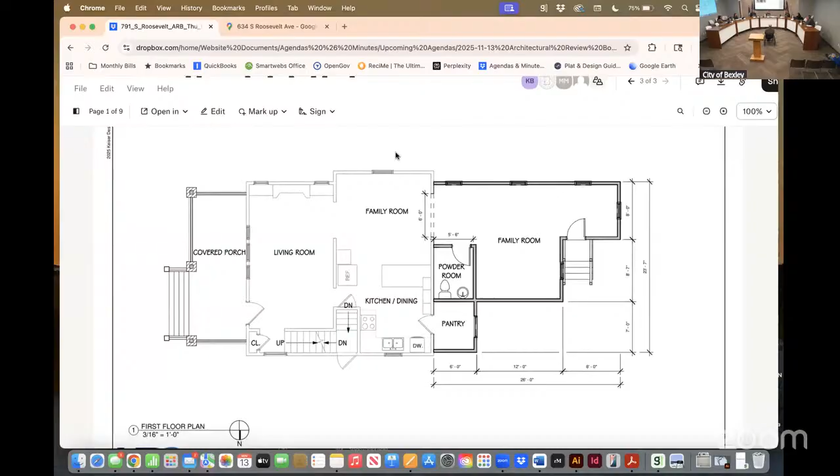The first floor is very deceiving, and when we do additions, the addition typically is always secondary to the main mass. On this floor plan, great, we pull in off of the kitchen and off the family room, but that family room is a bay window, it's a bay mass. If you go to the second floor, you've actually aligned the exterior walls of the top bedroom, middle bedroom, and now new bedroom - that facade is all flat and there's no step in that massing. That's something we typically don't like to see.

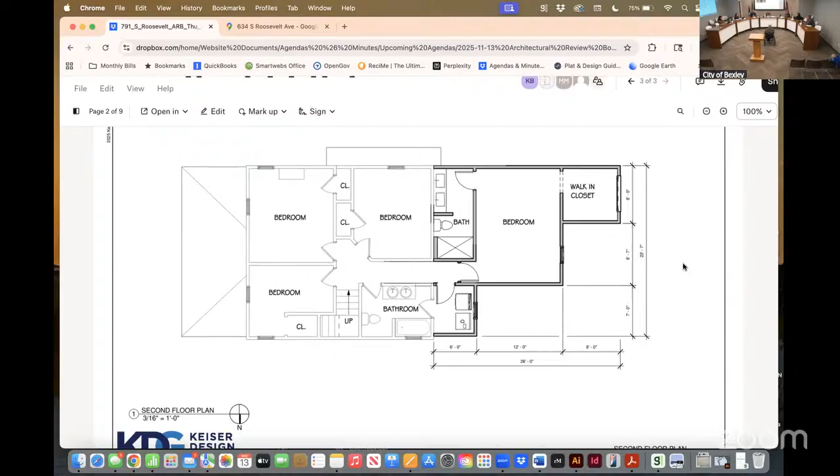So I know you're tight here. We just talked about the door, and I think that's a great suggestion to move that door. But pulling that in 6 inches to a foot reduces your construction cost a little bit, and it breaks the massing down, so I would definitely make a recommendation for that. You do have challenges with the roof and how you'd step that roof or have a larger overhang, but I'm sure you can work through that. Can we keep going on the drawings?

Love that you brought back the clipped gable. I do like the wider steps. The front porch is much nicer than what you have now. So I think I like all of that.

I also like how you're showing the existing house, though it's not accurate, because of some of the quirkiness, the quirky in a bad way, of the way the eaves are detailed in this siding. The aluminum and/or wood siding conversion from the original architecture is really kind of chopped up, and I think it's taken away from the character of the original house, I'm sure.

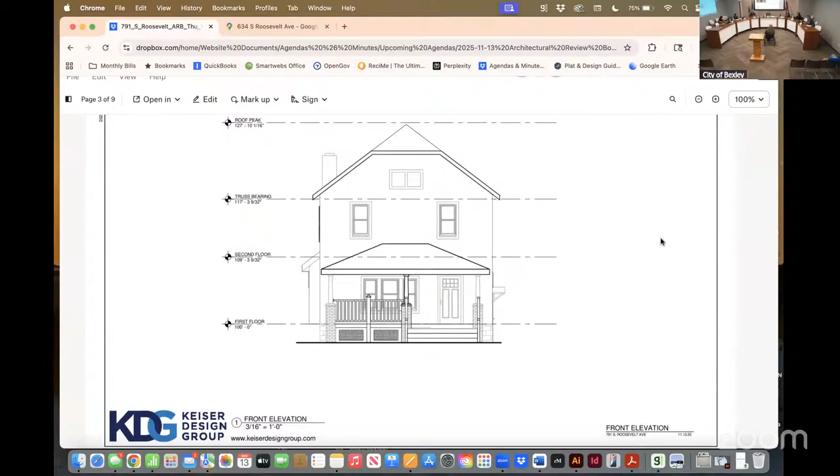This porch is not something that you would typically design where you had the columns coming right up and sitting, supporting the soffit - you would have a beam. And actually, if you go to the photograph, there is a beam. The original house has the beam, it's visible, the columns are sitting correctly on it.

If you zoom into the left one, if you can - I know that's gonna be difficult. When they added the new cladding, they flattened out the eave, the soffit, and it doesn't rise up. I'm almost convinced that the eaves rose up at an angle. Here they're flat. So now your drawing is actually correct, because if you're representing what's there, it's all just this kind of flat mass.

I don't like that. I think it's not true to the original nature of the house. And if you look at the second floor eave, the extension of the gables is correct, but then they've boxed out - and Mr. Heyer can correct me if that's a historical detail - they boxed out the soffit when it meets the massing of the house.

And I'm assuming that's the vinyl siding or aluminum siding characteristics at the time, correct? They just kind of flattened it out instead of keeping the angle of the framing. That pops out - see that little triangle? No, that would have all been angled.

So when you say you're trying to match the existing addition, I was like, no, please don't match that. I would love to see - I don't know how much work is happening on the rest of it, but I would love to take that back to its original character. It'll go a long way in bringing the character back to this house.

I love that you're keeping the clipped gable on the front. I would be open to it going away on the back, and there may be some objection here, because I think that would help you, give you some room to fix that massing and not have that weird angle coming out to that one addition.

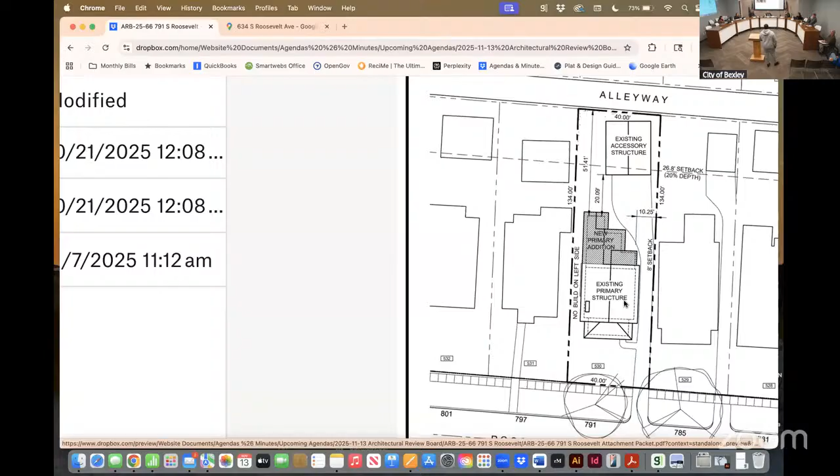Yeah, so if you have a driveway, it has to lead to rear yard parking. Currently it leads to two rear yard parking spots, which is required by code for the R6 district. If you entered off the alley, you basically can't stop your driveway right up against the garage at the front of your house or even the side. So you would remove the whole driveway from off the street, and you'd get a front yard, a side yard, more green space.

But something more rectangular, which would match your house better in the long run, and you only have two corners to turn, giving you better spaces. You wouldn't have all those weird squares. Thank you.

Can I also say, it looks like we're heading toward a table. What I want to make sure you're aware of—I know you know this—is that we don't meet in December, so it wouldn't be coming back till January. And I know how you work at the deadline, Mr. Miller.

Since we've been working together for a little while, I would highly encourage you to almost pretend there's a December meeting and get me drawings mid-December or early December, in the next few weeks, and we can work back and forth. When I get them the week before, I don't have time, and I'd like for you guys to be far along in January. I'm even willing to email them to board members to get their comments.

We can't have conversations outside of this meeting, but I can blind copy all of my board members on any interim plans, and then we can give you feedback so that when you come back in January, you can be more successful—hopefully pass, get a positive vote, and get on with your construction documents so you can get in the ground when the weather breaks in the spring. So I'm here to help you with that.